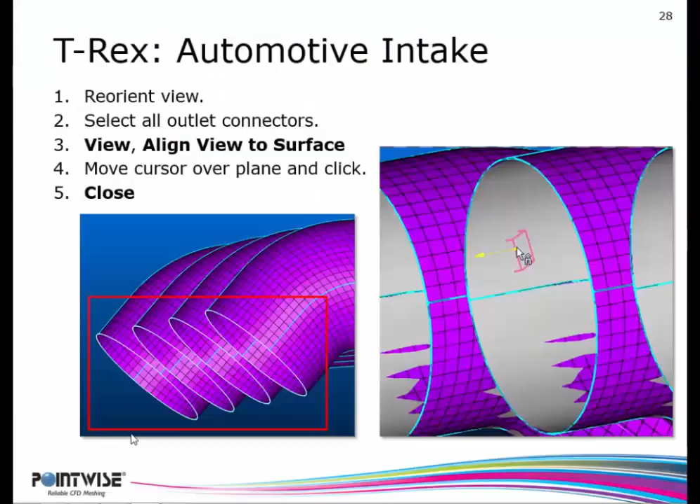So what we're going to do is we're going to pick up where we left off. When we stopped for the break, we had just set the orientation of our extrusion. So now what we're going to do is set up a couple of other attributes for the extrusion. All right, so we've already selected.

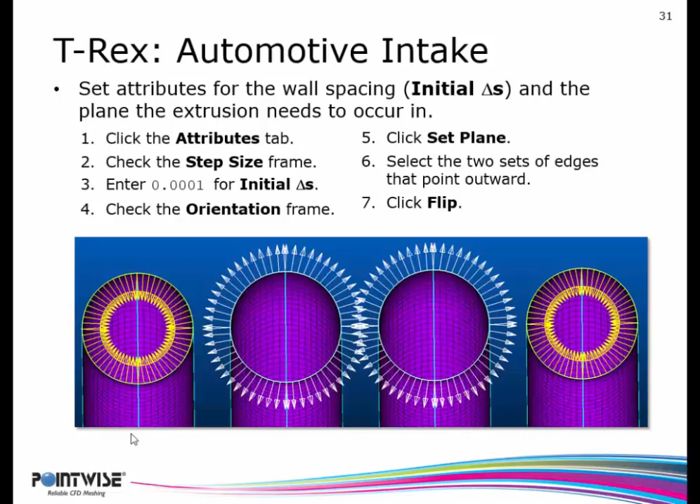Now you'll notice in your book, these edges are flipped outwards instead of the two that I had. This can vary. So what you need to know is when you're doing extrusion, make sure that all the marching vectors are pointing in the direction that you need them. Once you've done that, then the next thing I do is go to the step size frame and attributes and set your wall spacing. For this case, it's going to be 1e to the negative 4.

So up here, if I click on step size, right here, my initial delta S, I'm going to change this to 0.0001 and hit enter. Now, there's a little tip I'm going to give you here. When you're doing extrusion, most of the time you guys already know what your wall spacing needs to be based on whatever y plus value you're running. If you don't, and that's rare, I try to always keep my extrusion wall spacing smaller than this value right here, the minimum surface spacing.

The reason being is if it's larger, then when you extrude off your surface, you could be making a cell that is taller than it is wide. Does that make sense? And that tends to lead to increased crossing in corners and problem areas. So I try to keep my initial delta S smaller than the minimum surface spacing as a rule of thumb.

Now, we've set our initial delta S, we've set our orientation. Now what we want to do is we want to march our extrusion into the interior of each of these outlets to create this type of OH grid. So I'm going to do that for 25 steps. So this is giving me 25 layers effectively in my boundary layer for these pipes. So I'm going to click on Run and type in 25 and then click Run.

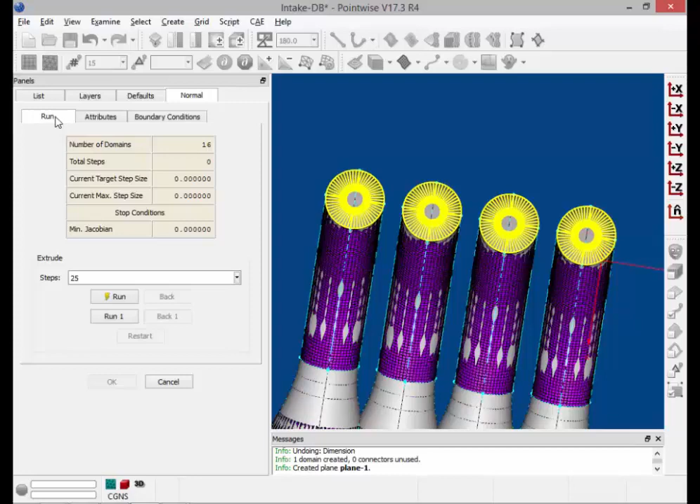Whoa, what happened there? That's not nice. All right, so let's go back and look. All right, all this looks okay. My orientation is fine. Nothing should be changed there. Let me see. Set plane is fine. Oh. All three. What? All right. Just 1 second. Okay, that's what I thought.

So what happened there is a mistake on my part. So when I was in the Attributes tab and I set that initial delta S, what I did wrong was I only had some of my outlets selected. I didn't have all 4 of my extrusion edges selected. So I only set my initial delta S on some of the edges, not all. The ones that failed were the ones that weren't selected, and they had the old initial delta S, which is a large value for this outlet.

So now, if I select all of them, you'll notice that in the initial delta S field it's blank. And in Pointwise, whenever you select multiple things and you have a field blank like this, that typically indicates there's a mixture of settings for it. So that's a clue to me of where I went wrong.

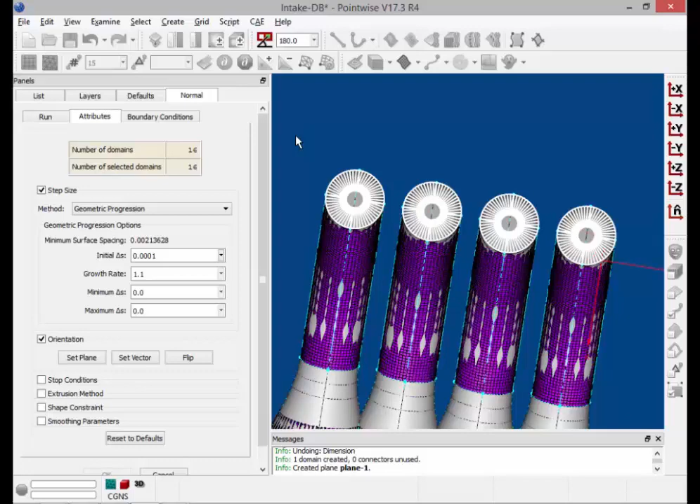So let me go ahead and fix this and type in 0.0001 and hit enter. And then go to Run and run my 25 steps in. I'm going to click on OK. So you should see what we have as a result in each outlet is an extrusion that looks like this. Okay?

So now to finish off these outlet domains, there's a couple of things we have left to do. The first thing is, for each outlet, we need to pick these 4 connectors and assemble a structured domain. So that'll give us an OH topology. The next thing we're going to do after that is we're going to run the elliptic solver on these domains to smooth them out and optimize the shape, much like what Eric showed you earlier using the floating BC.

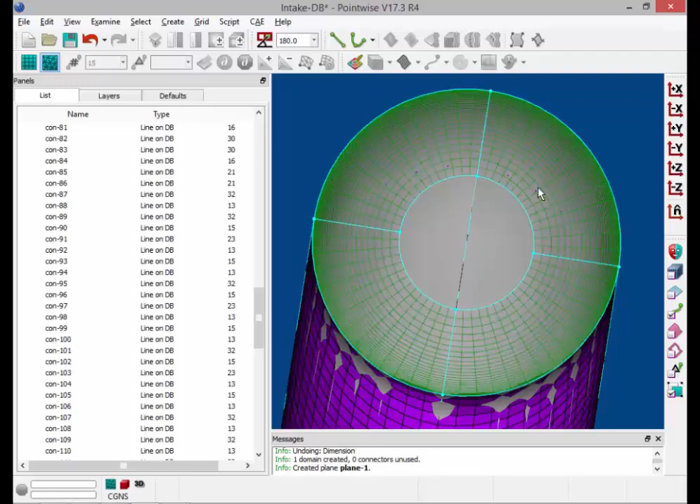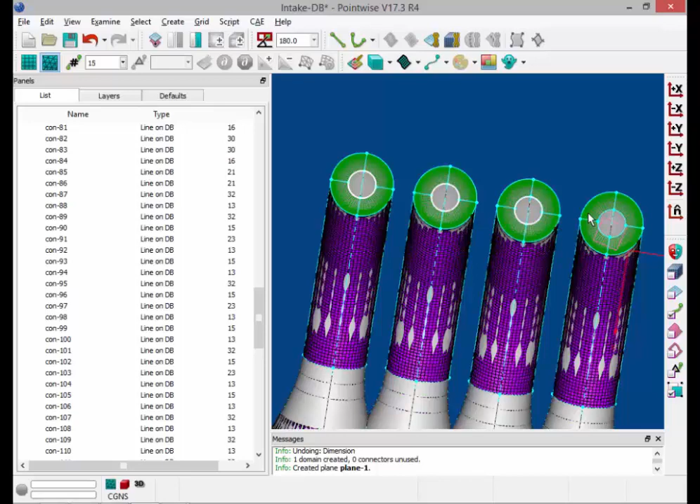So here you can see we're going to select these 4 connectors. We're going to select the structured grid type and then assemble domains. So I'm going to zoom out a little bit. And I'm going to use a shift select box to go through and select these sets of connectors. I'm going to make sure I set my grid type to structured, and then I'm going to pick assemble domains. All right, so now I have my 5 structured domains at each exit.

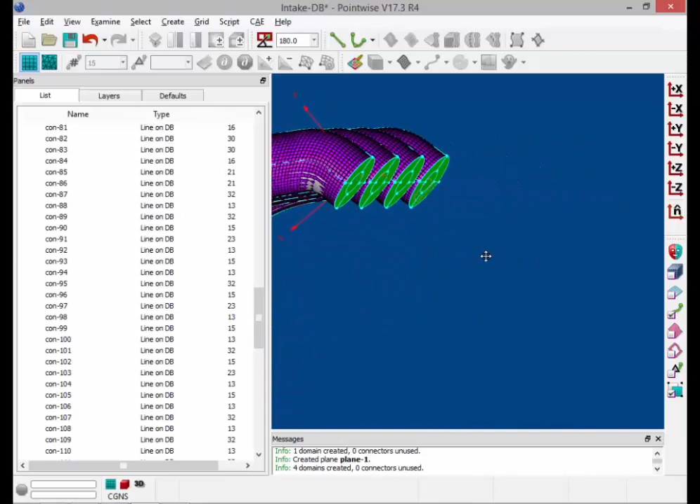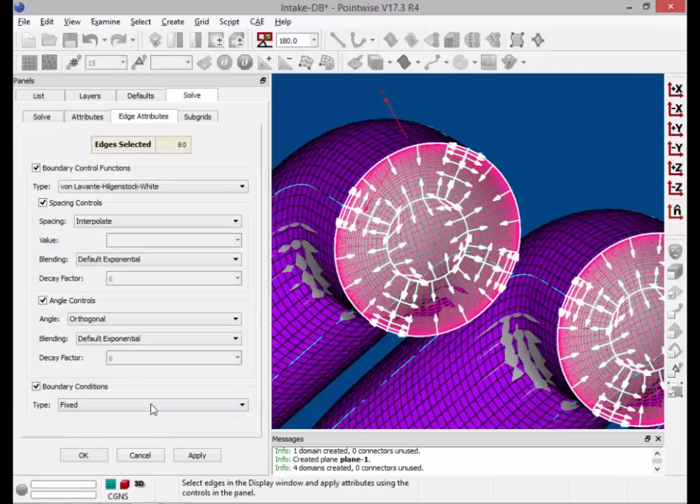I'm going to run them through the elliptic solver just like we talked about. So I'm going to use the selection box again to grab just the outlet domains and go to Grid, Solve. And this is very easy to do. All I have to do in Edge Attributes is change the boundary condition from fixed to floating. And then under the Solve tab, I'm just going to run these for 50 iterations.

So now, my OH grids have all been modified. The boundary shape's been modified, just like what Eric showed you earlier, for a more optimized shape. What I like about using the floating BC for these types of topologies is, before I did this, the skewness in these 4 corners was really bad. And this significantly improves the skewness in these corners.

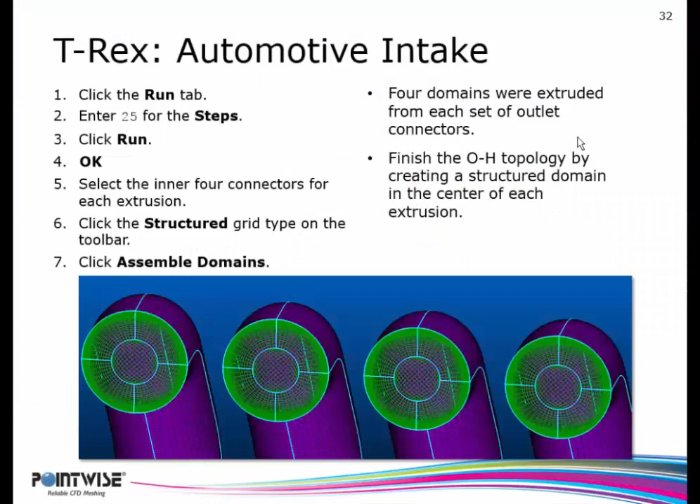All right, and this is just sort of going over what we just did in the solver. Here's what those domains look like. The skewness before we ran them through the solver: the maximum value for equiangle skew was 0.9. And then after we ran them in the solver for 50 iterations, it went down to 0.34. So it was a significant improvement in the skewness.

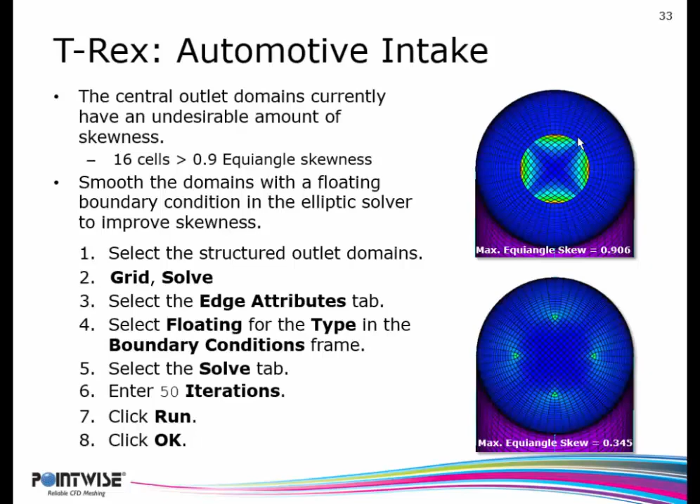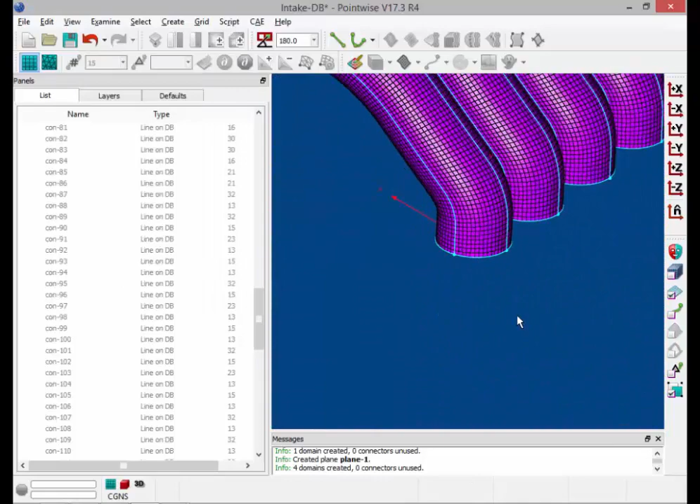So we've got all the domains. So now what we need to do is create our block. This is the easiest step. So we're just going to go in here. I'm going to zoom out a little bit. I'm going to turn off the display of the database too. Let's see. I'm going to select all these domains. I'm going to set my grid type to unstructured. And then I'm going to go to the block assemble command up in the toolbar and click on that.

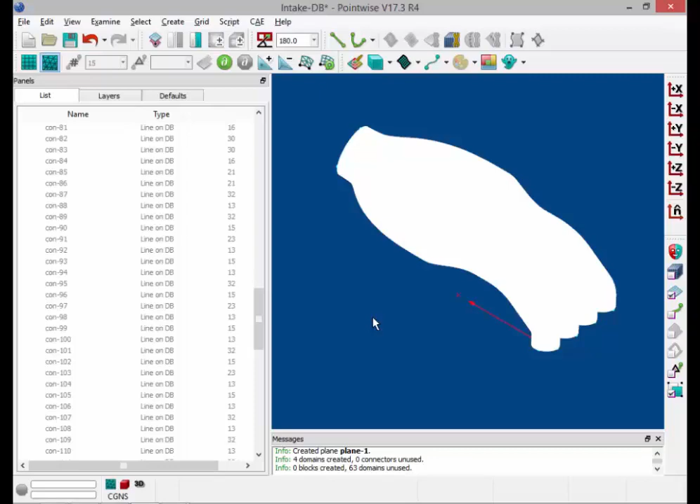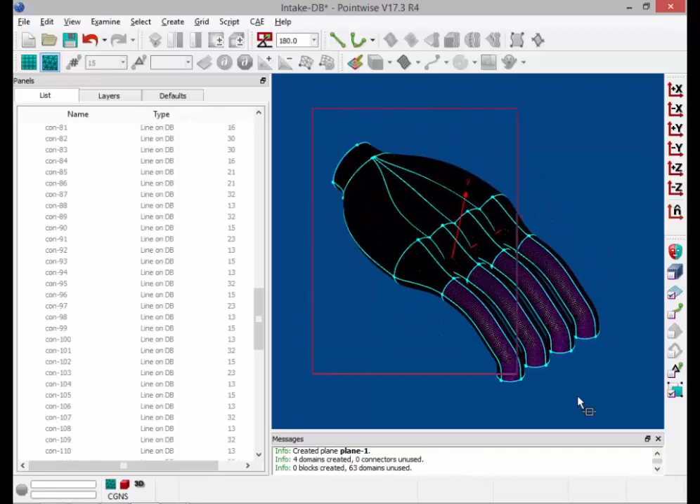Let's see, it says 0 blocks created, 63 domains unused. So why don't we have a block? Let's look. We have all of our outlet domains created. We have our inlet domain created. All right, so does anybody have any ideas what a typical reason for a block not being created is? The dimension connectors between the structured and unstructured mesh. It could be that we missed one of those and it's not watertight. Watertightness is the most common reason for a block failing to assemble.

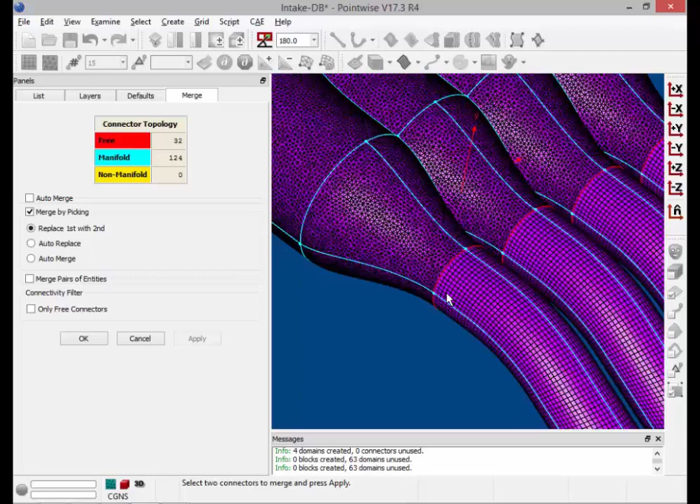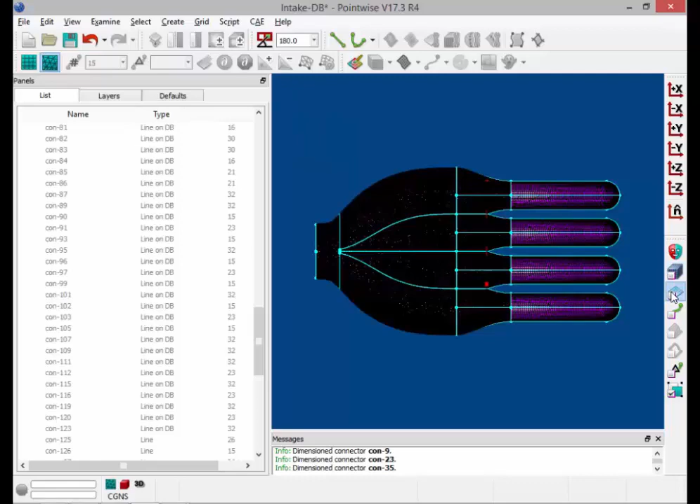All right, so let's go. Yes. Yeah. Because remember earlier, we undid this step when we were playing around with that, and I never redid it. So he hit the nail on the head. Very observant. So this is easy to fix. You guys remember what the fix was? We're just going to change the view. We're going to grab the connectors, not the domains. And I'm going to change those to 15. They're now identical. So now, if I select all the domains, I should be able to assemble the block. Yep. So, good catch. It's just about always a watertightness issue if you can't assemble the block.

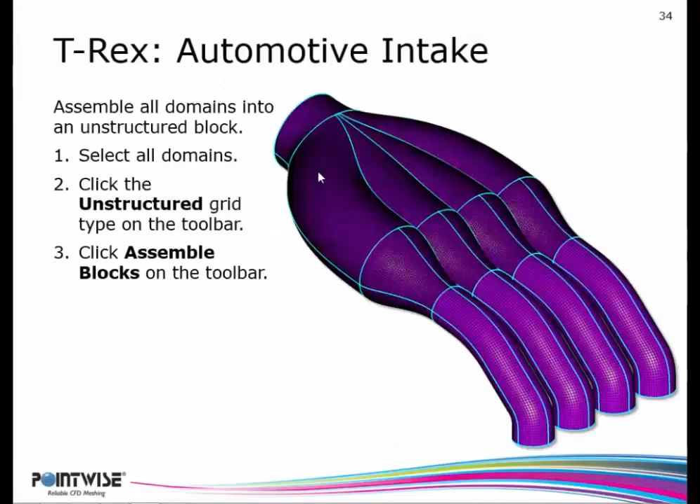All right. So now let's go in and set up some of those T-Rex attributes we talked about earlier. So we're going to select the block and go to Grid T-Rex. For the max layers, I know that in that O-H portion of the grid, I set the O grids to be about 25 layers. So I think 40 is ambitious, but I'm going to put a larger value in there than I think I'm going to get, just to let everything grow out to isotropy. I'm going to set 5 for full layers. For this case, I'd like to ensure I get a certain number of prisms and hexes in the initial boundary layer. So I'm going to shoot for 5 layers.

I'm going to turn on push attributes. So push attributes is what tells Pointwise, if you have an unstructured domain set to a match boundary condition, you can change the characteristics of that domain to match the T-Rex boundary layer. So it can modify the domain itself. And where this is going to come into play is the inlet domain for the entire intake. You'll see it get updated.

In the advanced frame, we're going to change the collision buffer. In this case, I'm going to set it high. I have pipes, and they're all growing in. I know they're going to collide, and I want a reasonable area inside the pipes for tets to grow. So I'm going to set it to a large value and use 4. In the skew criteria frame, I'm going to set this to 170, and then we're going to initialize.

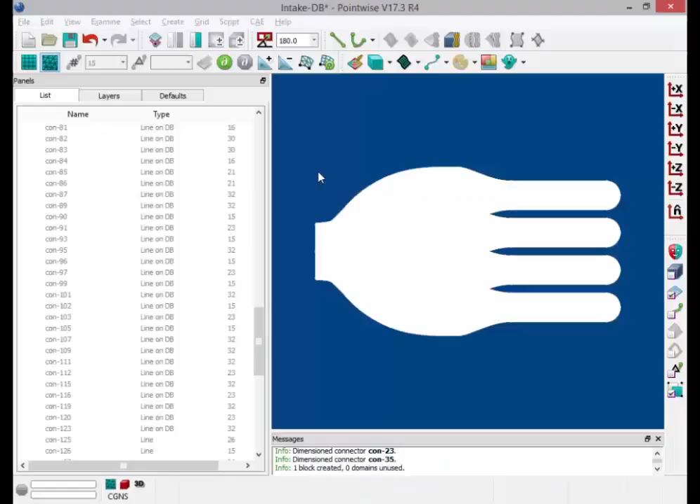So I'm going to select my block, go to Grid T-Rex. I'm going to set my max layers to 40, and I'm going to set my full layers to 5. I'm going to turn on push attributes so it can modify my unstructured match domains. In the advanced frame, I'm going to uncheck use default for the collision buffer and increase it to 4.

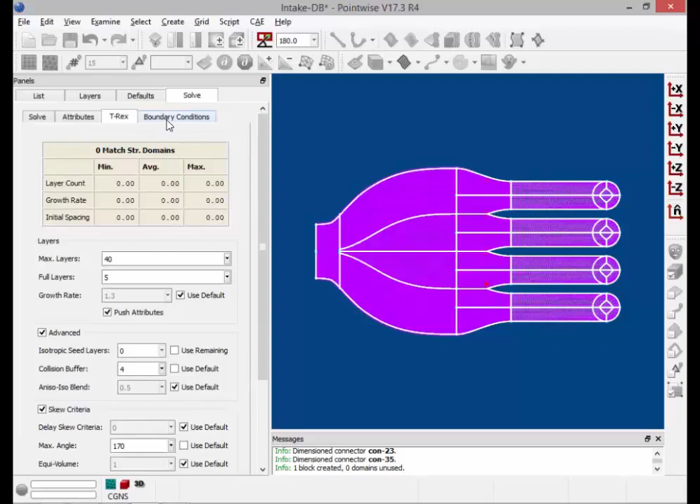Then I'm going to come down here to skew criteria, and I'm going to set my max angle to 170. This value works well for most solvers. If you're using OpenFOAM, you're always going to want to use 160. So, just a note. Now, boundary conditions are the next thing that we need to do, and this is an important stage.

So what we want to do here is we want to create all the boundary conditions we're going to need for this mesh. I need one identifying the inlet domains as match. I need one for the outlet structured domains that we created. They're also going to be match. And then I need one for the intake walls. Those are going to be all the other domains that we're going to grow off of.

Now, my strategy when creating boundary conditions for T-Rex is to do the easy ones first. The reason for that is if I do the ones that are really easy to pick first, like the inlet and the outlets, all that's left are the domains that go into one BC. So I can use a trick to select those and assign them so I don't have to pick them out by hand. So let's go ahead and create these BCs. So I'm going to go to New and name this Inlet and set the type to match.

Now, you are going to see something here I have not talked about, which is adjacent grid. This type for T-Rex is for a very limited case, and it's where you have a T-Rex block, and it sits on top of an existing structured block or a prism block. And in that situation, you most likely want the layers that grow in the bottom of the T-Rex block to grow so that there's not a volume ratio jump between the two blocks.

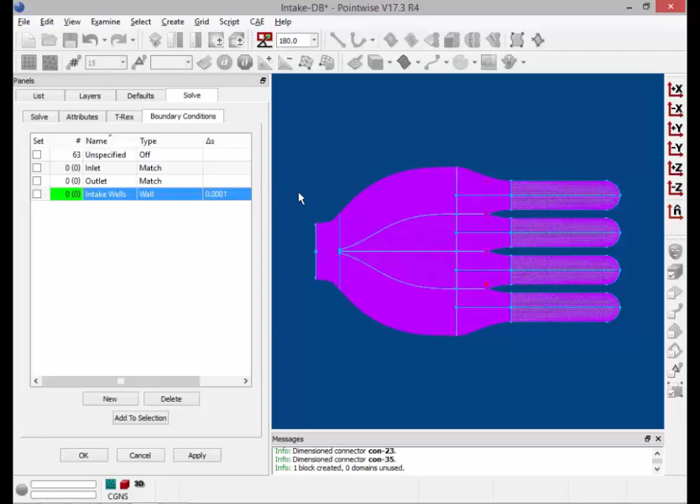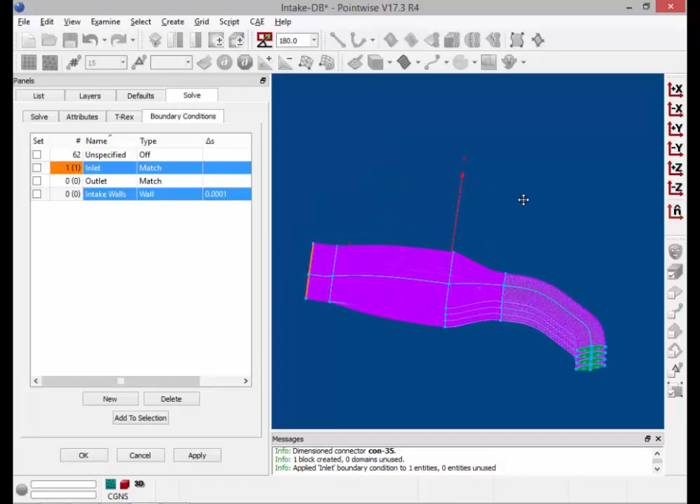All right. So now we just need to go around and assign these boundary conditions. So the first one is the inlet domain. I'm going to select it and then come over here and click on Set for the inlet BC, and you see that the number field is populated with a 1. Then I'm going to rotate this around, and I'm going to use a selection box to grab all those structured outlet domains I just created. I'm going to come over to the table and click on Set for Outlet.

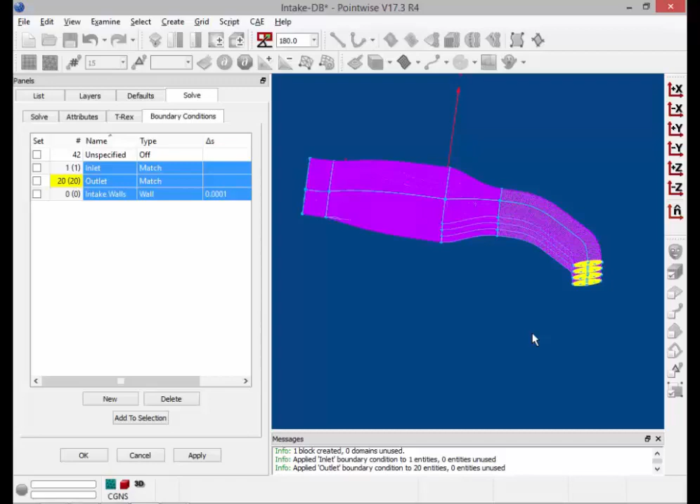Now, my trick is, like I said, always pick the easy ones first. Everything that's left that hasn't been set is sitting up here in the unspecified BC. So my trick is simple. I'm going to click on Unspecified. I'm going to use this button called Add to Selection at the bottom of the panel, which selects everything. And then I'm going to click on Intake Walls.

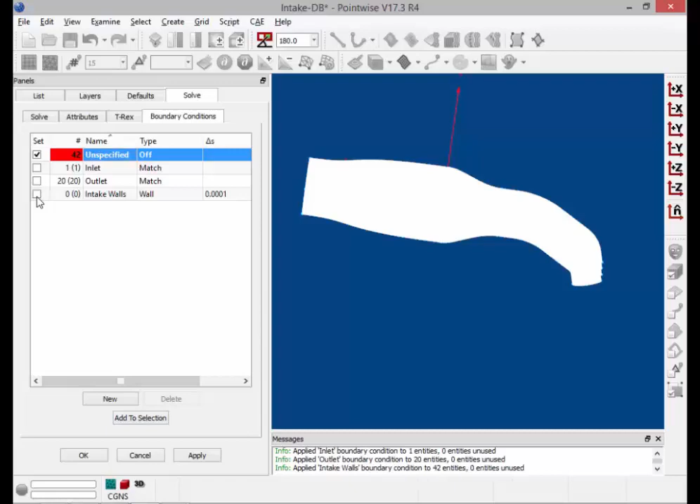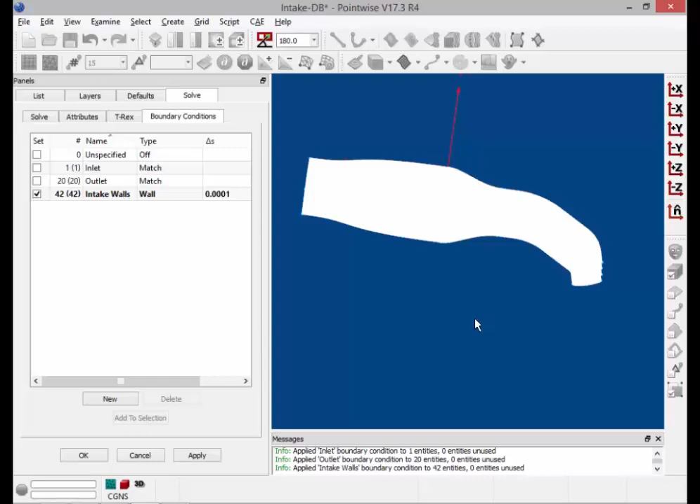It seems trivial, but I routinely work with these really large grids that have thousands and thousands of domains. This trick has worked out for me very well with all those cases. There's always a couple of simple BCs you have to set, and then 500 domains that have to go into one. So this is a great productivity enhancer. All right, so we've set everything. So now there's one more step.

You'll notice that when I was setting up the T-Rex attributes, I completely skipped growth rate. That's because of this table that we've added. So this table at the top of the T-Rex panel essentially is giving you feedback about any structured domains that are set to a match boundary condition. Because when you grow T-Rex alongside structured domains, you don't want T-Rex to modify those domains.

In general, we believe structured grids are sacred. Don't touch them, don't modify them. Somebody spent a lot of time making them look exactly how they look. So we want users to be able to make sure that T-Rex is matching them as closely as possible. So as soon as we set those structured domains to a match boundary condition, this table got updated with all the information we know about those domains.

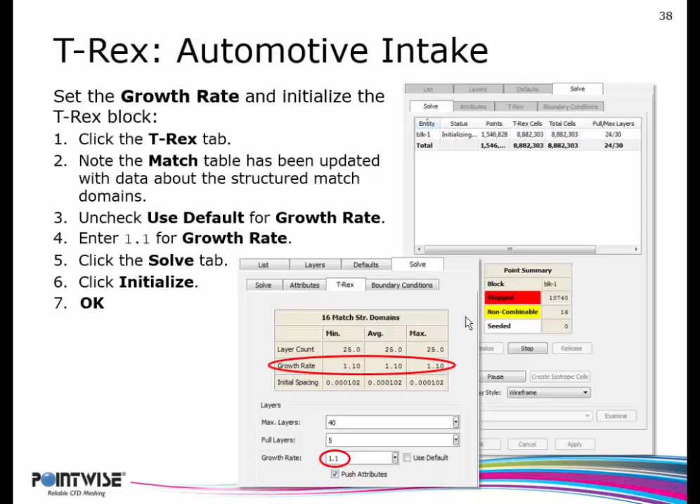So if I switch back over to that T-Rex tab, I can now look at my settings and make sure that they're good for those structured domains. All right, so T-Rex. Yep, sure enough, it's populated. So this is telling me that for all the structured match domains, the initial spacing is 1e-4. Now, when it started, it was exactly 1e-4, and you can see that now it's 1.02e-4. So it did modify that spacing a tiny bit.

I don't think it's enough to change what we're going to do, though. The growth rate has stayed at 1.1, which was what we used for the extrusion. So I'm going to use that growth rate with my T-Rex grid here so that it matches. I've already set the wall spacing for my T-Rex grid to be 1e-4, so that matches up.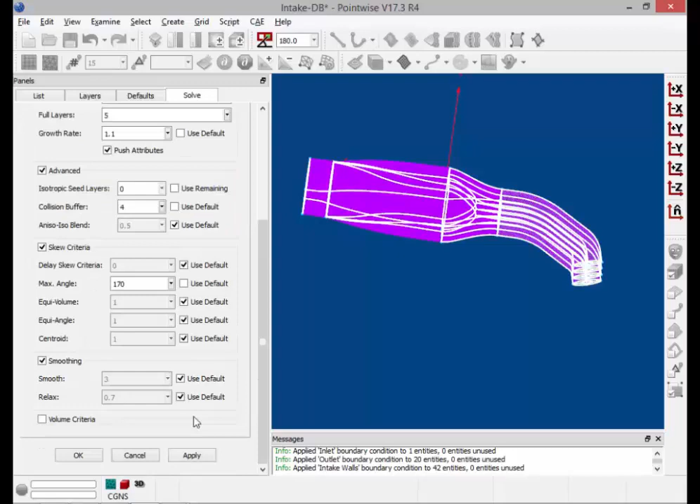So I'm going to uncheck Use Default and set my growth rate to 1.1. Any questions about any of this so far? All right, so now we're ready to run this. Get a good view. So I'm going to click Initialize, and I'm going to also expand this.

Now, I'll tell you right now, this T-Rex frame is wide. So when it's running, I usually stretch it out so I can see all the information. And there's quite a bit that's going to happen here. So the white that you see is the front growing. This is the vertices advancing. And you're going to see this updated here with the number of cells, the number of layers.

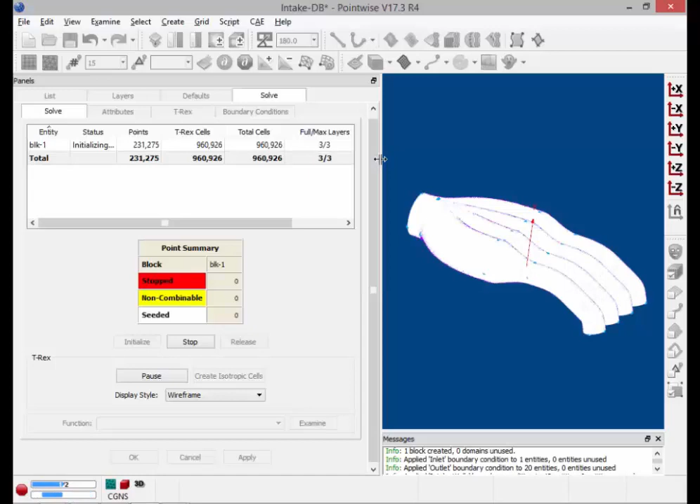You see a number and a slash and another number. So on the left, that's the full number of layers you're achieving. On the right, that's total layers you're getting. So right now, we're 3 for 3. Down here, this is going to be populated once we have interior points begin to stop locally. It's giving you feedback about those points.

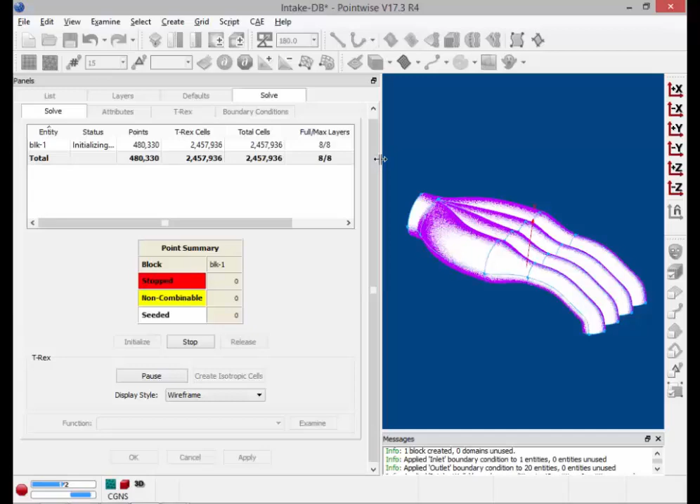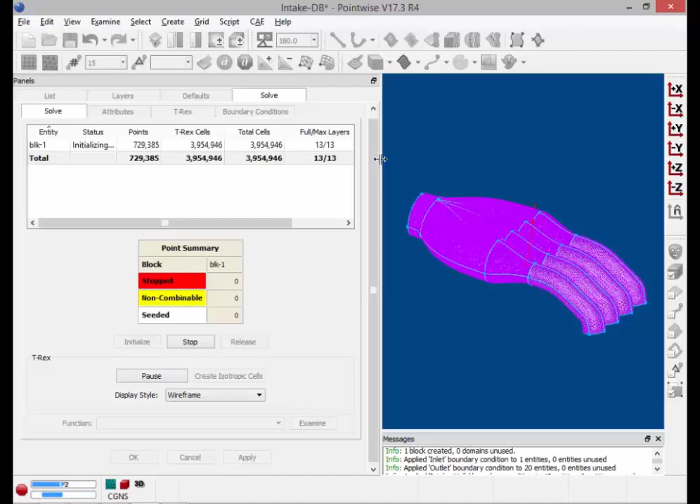So it's marching out. We've already exceeded the 5 full layers that I asked for. So who knows how far it could get now. We should start to see some points stop soon. So you want to start looking for red. When you see the first red point, that's actually a really important thing for me. I usually initialize a grid once, and I watch it like this, and I look for that first red point.

And then once it's finished initializing, I go look at the surface mesh right there. And I see, was there something wrong with my surface mesh that was the cause of it stopping there early, or did it just stop because it reached isotropy? If it's isotropy, great. If there was an issue with my surface mesh, then I want to fix that and then reinitialize.

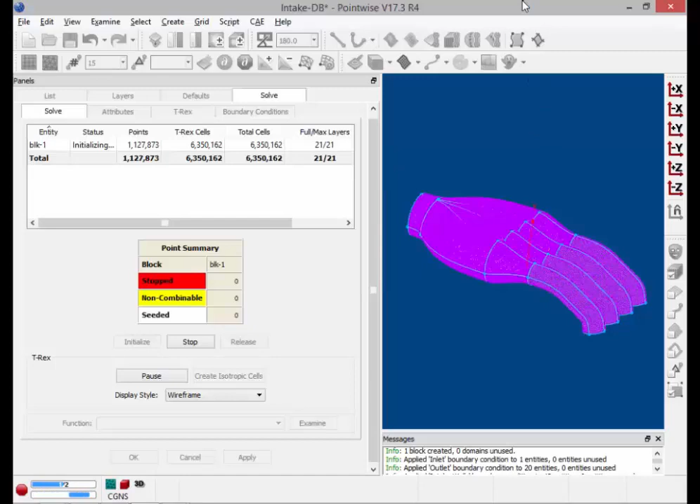Okay, so 20 is still going. It's just that you can't see what's going on inside here. Let me see if we can zoom in and get a little bit better view. No. Well, while we're waiting, any questions about what's going on so far?

Yeah. Would it be also possible to use the nice outlet mesh to extrude it to the... Yeah, that's... Again, use only T-Rex in the unstructured part because then you would have a nice... That's definitely a way to do it. Actually, before I put this together, I meshed this like 3 different ways, and I was trying to decide which way I wanted to do for the presentation. That was one of the ways we did it.

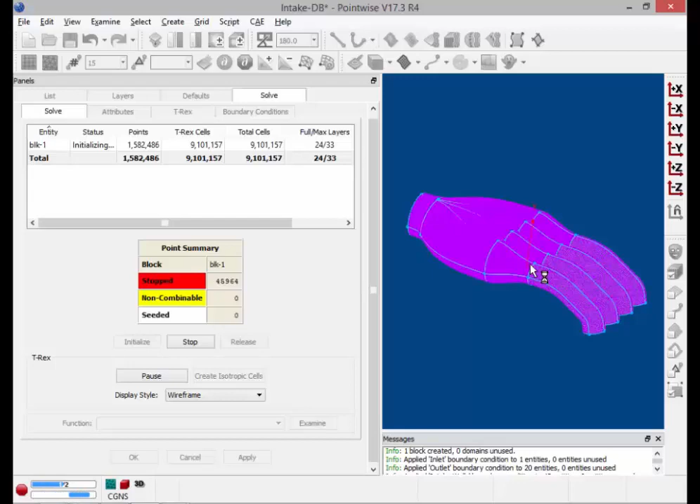If I remember right, what I did was, I made the outlet domain, and then I used one of the connectors on the surface as a path connector, and I marched it through like that. And T-Rex in the other section. Right, so one section was all hexa, and then T-Rex was in that part where, you know, the bulb coming into the pipes. 2 steps, not in 1. Yeah, 2 steps.

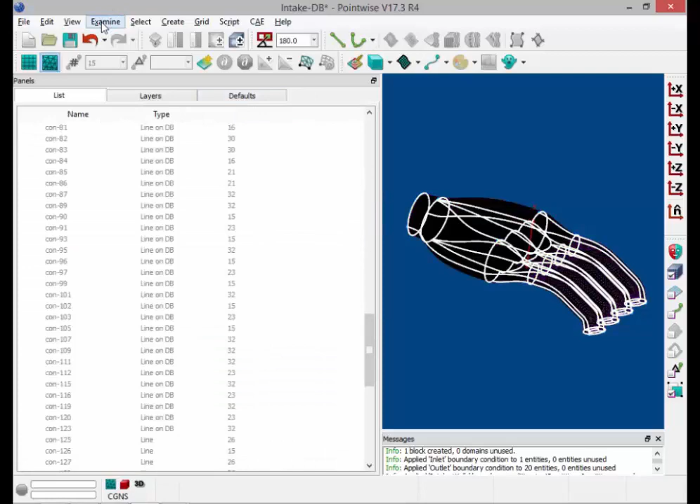Okay, it finished. We got 23 full layers and 33 total layers. So let's see what this looks like. Now, I'm going to select my block and go to Examine and Max Included Angle. I'm going to go to Cuts, and I'm going to turn on Enable Cutting, and then change it to a Z physical cut. Now, I'm going to move this cut to the middle of one of these pipes.

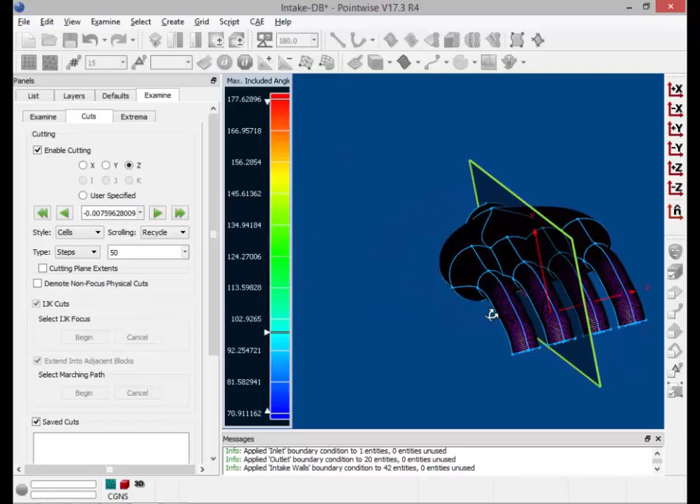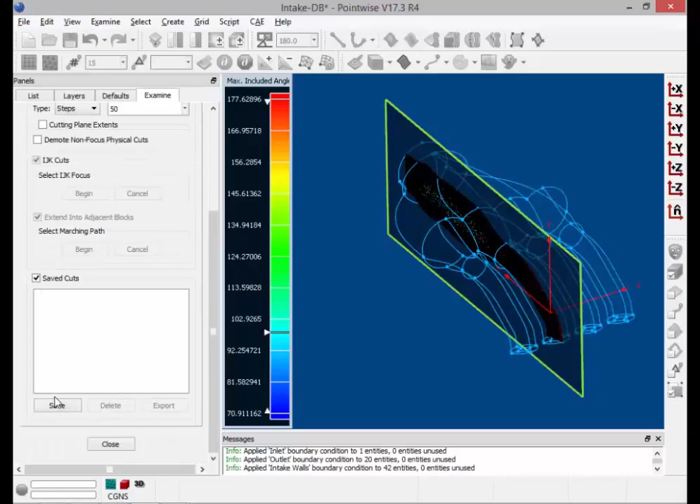Now, the only problem right now is I've got a cut, but you can't see anything. So I'm going to turn off the display of domains so it's easier to see my cut. So View, Show Domains is turned off. I'm going to save the cut too. And now let's click on a Z view and zoom in. So you can see the layers that we got in the pipe region and up here.

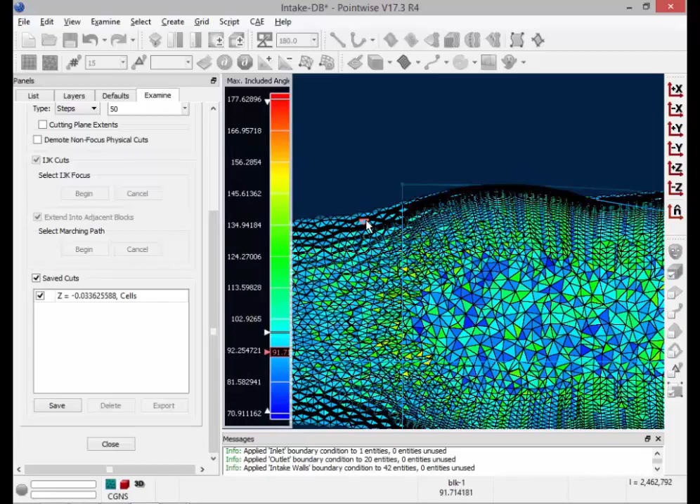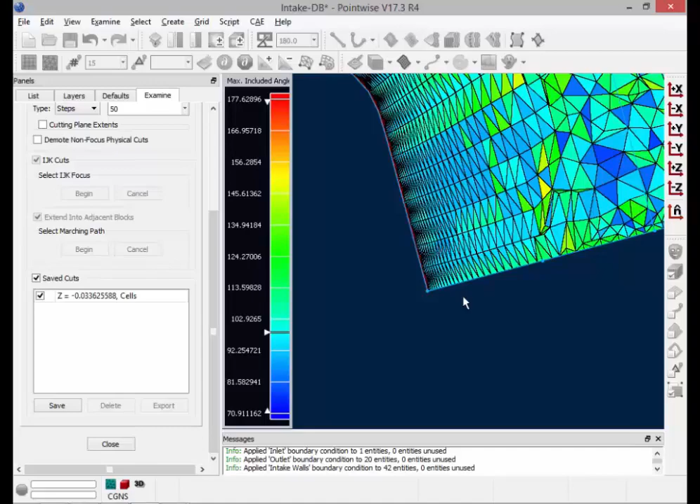Now, what you're seeing here though, and I'm sure you're all probably wondering about this, is those don't look like hexa or prisms. That's because T-Rex in version 17.3R4 creates tets, anisotets, and pyramids. And then when you export, it combines all those into prisms and hexa.

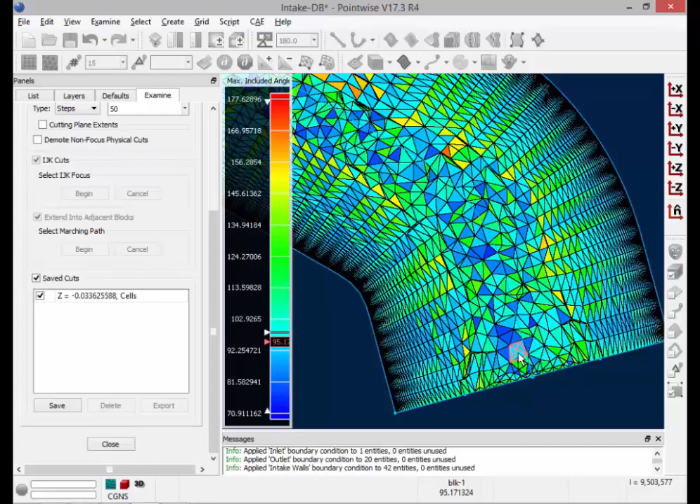In version 18, which we are working on right now, all this happens on the fly. You can get hexas or prisms as you extrude. And this is sort of a preview of what it looks like in version 18.

I'm not going to show you any more because it really is still under development. But we have some lovely hexa layers.

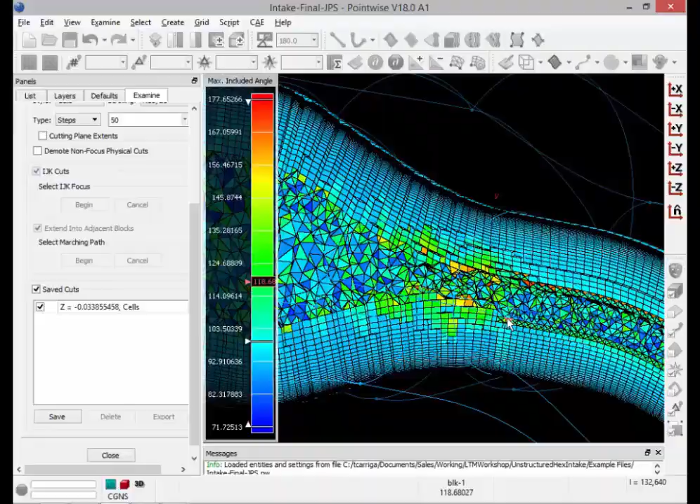So in the version of Pointwise that you currently have, you still have tets. To get hexes and prisms, you have to exit out of Examine, export your file to your CAE, and give it a name. When you export to your CAE, you're going to want to check on this Combine anisotropic tetrahedra.

What this is going to do is tell Pointwise it can go ahead and start combining those layers of anisotets into prisms and hexes. It will also touch the pyramids.

For this case, when we export it, right now it's around 9 million cells when it's all tets. When we export it, it combines down to 2.1 million prisms and around 400,000 hexa, for a total grid size of about 3.2 million. So it's a pretty significant reduction.

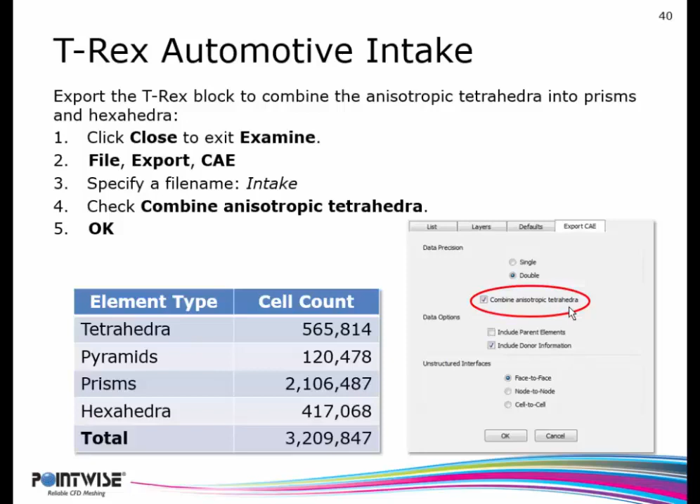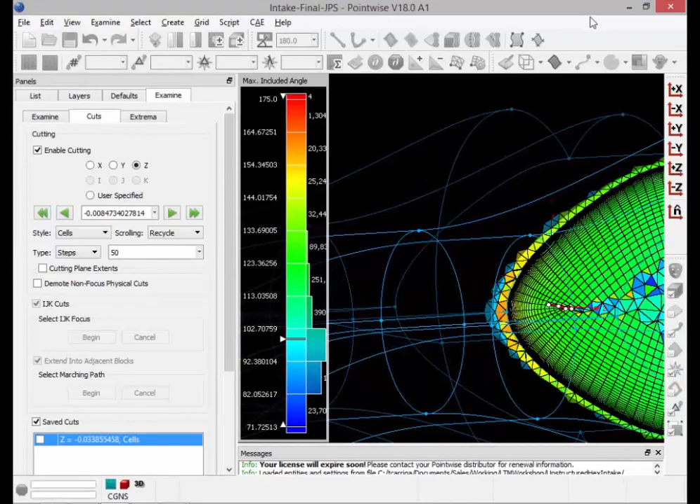Now, talking about this T-Rex cell combination, there's actually a lot of different solvers that can do this. Right now, for this case, I am using CGNS.

CGNS is sort of our generic default that we recommend, but if you use any of these other solvers, you should have access to this cell combination on export. And this list grows day by day as we add solvers.

Pretty much if your CAE solver supports all the cell types that exist in a T-Rex combined mesh—prisms, pyramids, tets, and hexes—you'll get those cells.

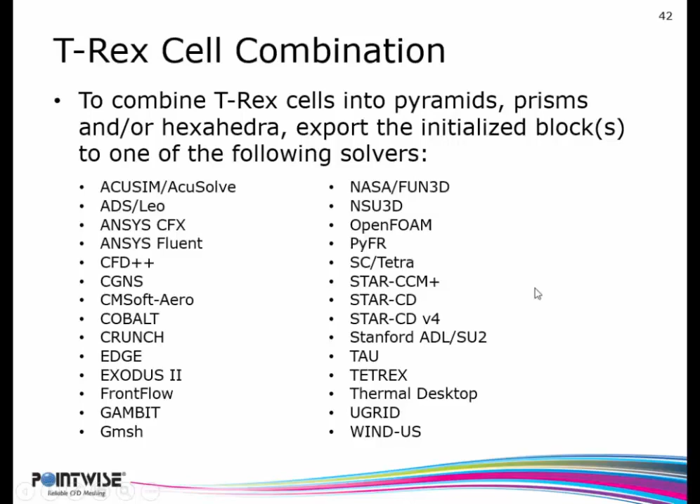Now, when you grow cells off the unstructured domains, every stack of 3 tets will be combined into a prism. And off structured domains, those base 7 cells get combined into 1 hexa. After that, it falls right back into that same algorithm we use for unstructured.

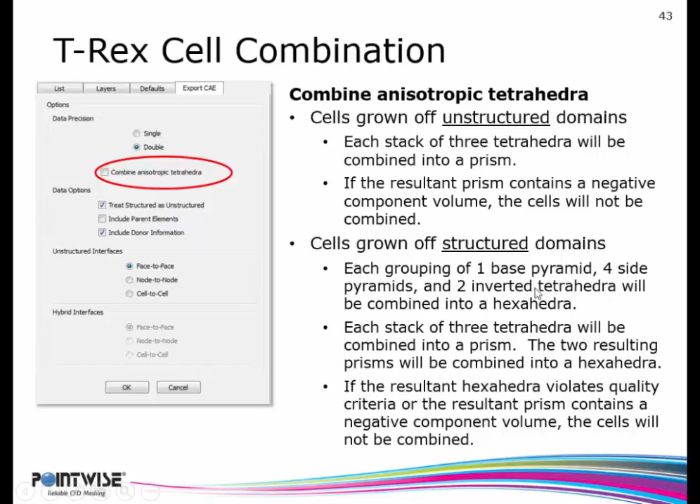After combination, if it was an all unstructured surface mesh, you could see up to 67% cell count reduction for your T-Rex mesh. Theoretically, if your surface mesh was all structured, you could see up to 88% cell count reduction.

But most people I've talked to like to use a hybrid approach. Most people aren't using all structured or all unstructured. They're doing sort of what we had here with the intake manifold, where a portion of their grid uses structured domains, a portion uses unstructured, and they're trying to leverage both techniques. So in general, it's usually a mixture.

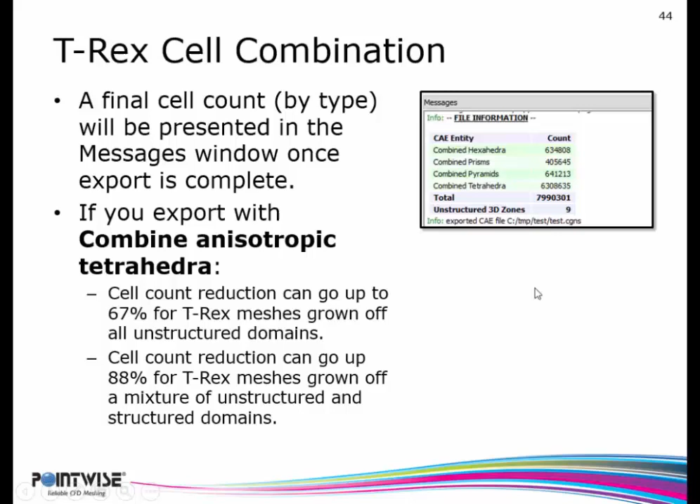We're going to move on to best practices. Some of these we've already talked about in the course of that case study and questions. So what I did here is I looked at the most common questions and problems we've had from customers over the past years with T-Rex, and I tried to collect those together.

The first one that I see crop up a lot is large area ratios in the surface mesh. These usually occur at a domain boundary like this.

Typically, it's because people just weren't paying attention to spacing constraints. I've done it myself where I thought I changed all my spacing constraints at the boundaries the way I wanted them, and I missed one, and I got something like this.

So what I tend to do is whenever I'm creating a mesh—not just for T-Rex, any unstructured mesh—I create my surface mesh, and when I'm finished, I do a visual inspection. I go around the model, rotating it, looking at it, and wherever I have a node junction like this where many connectors come into one node, I usually select all the spacing constraints of that node and set them to the same value.

It's very safe to do with an unstructured mesh or a hybrid mesh. And that would resolve this issue if you did this as a step before you got to block creation and initializing your T-Rex mesh. Go around and examine all those node junctions to make sure they have similar spacing values.

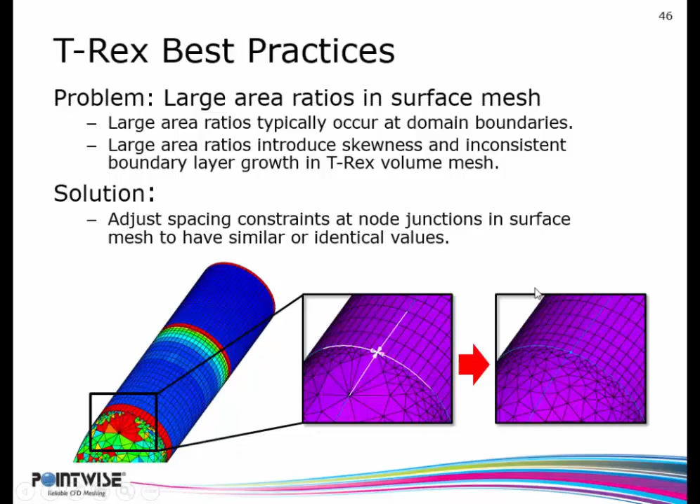Now, the other issue that comes up a great deal: it seems like almost every geometry we see has at least one surface that looks like this. It's very long and skinny. And if you put an isotropic unstructured domain on that surface, it's not going to look good.

By not looking good, what I mean is, for a wing like this, most people would want 3 cells across the trailing edge, consistently, all the way across. If it was an unstructured domain, you'd get 3 cells at the very end, then it would start making 1 cell across, and then 3 cells at the other end, and it would look sort of funny. So most people like structured domains for this reason.

So how you handle this type of surface is put a structured domain on it and create a T-Rex mesh, where you would get hexa off of that. Or if you want an all-prism T-Rex mesh, create the structured domain and then select it and go to create diagonalize. This will allow you to put a diagonal edge through each quad, which should result in prisms when you export.

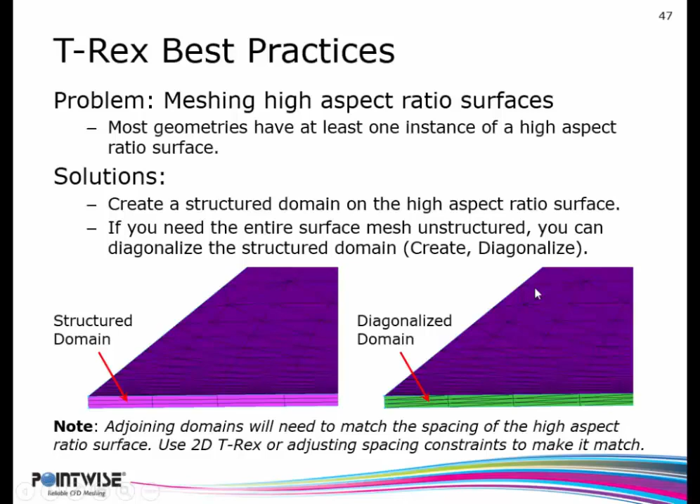Another thing we see a good bit is somebody will create a T-Rex mesh, take a cut through like this one, and see this fanning in the isotropic mesh where it connects. Have any of you ever seen this or had this problem? Nope.

Typically, this is a result of the surface mesh having too high of an aspect ratio. T-Rex can handle anisotropic surface cells, but there's a certain point at which it's not optimum anymore, and it struggles to connect up and create high-quality tets at the interface.

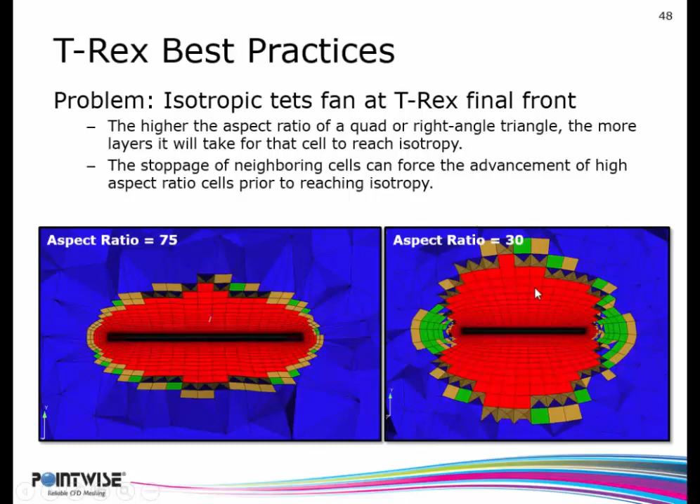So what I always advise in that case is take your surface mesh and change the aspect ratio. Get it down—I like to get mine under 40 if I can. The reason being, that's going to reduce that fanning and give you a more consistent growth of your T-Rex layers. You can see the fanning's been reduced here by doing this, and it's really easy to take care of this problem.

One way to do it: let's say if it was a wing, increase the dimensions of the connectors in that direction to bring your aspect ratio down. Sometimes it's a spacing issue where somebody's got very tight spacings on the domain on either side and the center of the domain has gotten very stretched.

A third option I've seen people use, but it doesn't have as big of an impact as these first two, is sometimes you can get a little bit of mileage out of using an MRQS distribution instead of a hyperbolic tangent. With an MRQS, you have a little less stretching in the center of a connector than with a hyperbolic tangent, but you won't get the same effect as these two.

If I've got a surface mesh that's quads, I try to get it below 10 for the aspect ratio for the best possible results in the volume. If I've got an unstructured surface mesh, I try to get the aspect ratio generally under 40 for the best results. You can also use that aniso-iso blending factor I talked about earlier—bump it up to 1, which is the maximum, and that will also help the transition from the high aspect ratio surface cells.

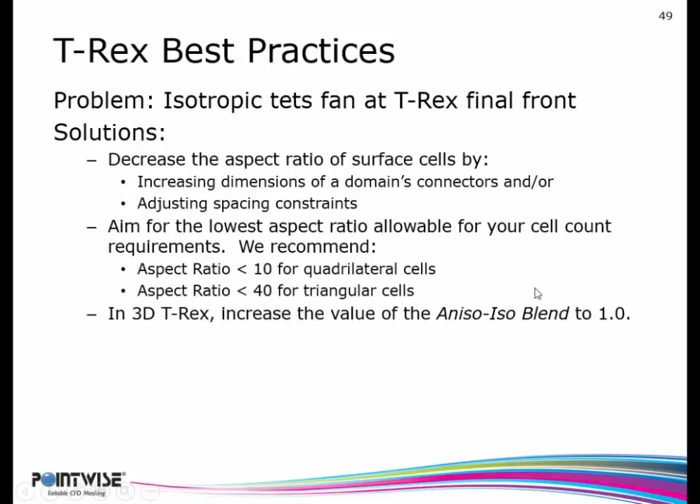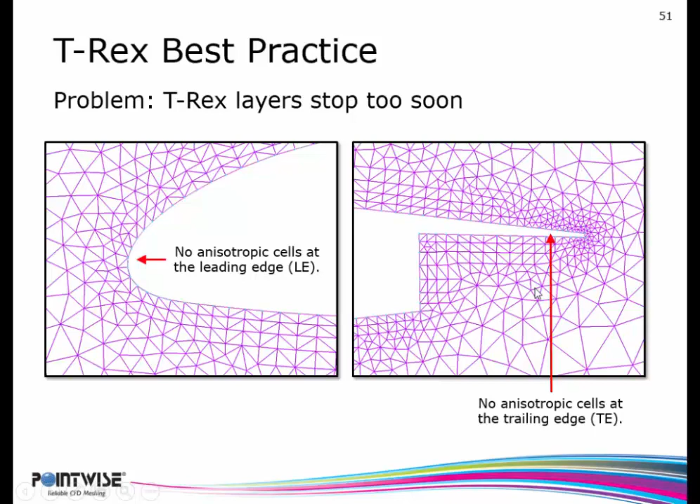So there are a couple of ways we can try to solve this. We can set the full layers attribute to a non-zero value. This is going to force the T-Rex cells to go past isotropy, so they're going to be anisotropic in the direction normal to the surface. It will still stop locally if we encounter a negative area, a collision, or a skew criteria violation, but it will push it past isotropy for these scenarios.

The other thing you could do is change the spacing of the grid points so that the edge length locally is larger than the T-Rex wall spacing. That would also give you some cells. In general, I use a combination of these two solutions. When I run into that, I set full layers to a non-zero value, and then in some areas of the grid, I change the grid spacing too on the surface.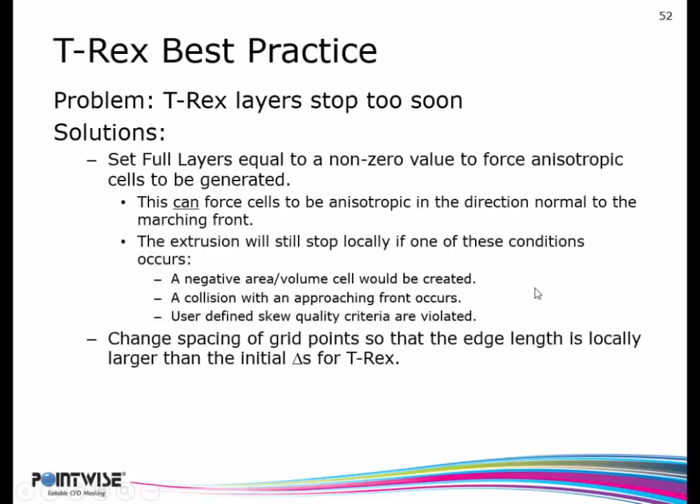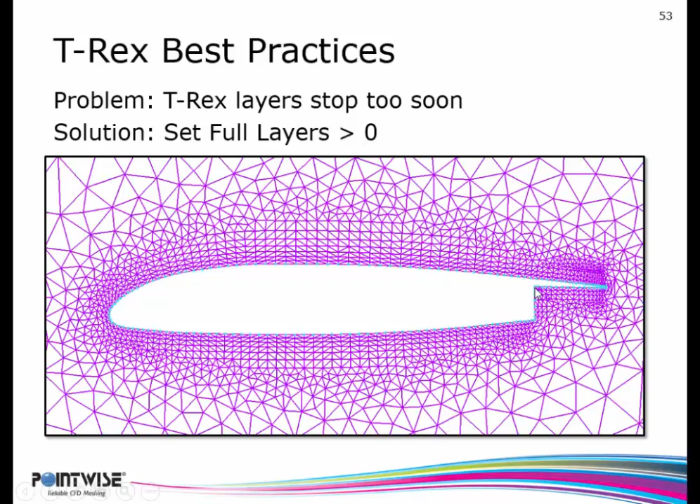If you look at an example of this, in this case I've just used one of the solutions. I've set full layers to a value greater than 0. If I remember right, I set it to 3, and you can see that here. I've got 3 nice T-Rex layers on the leading edge. I love the effect, actually. However, the trailing edge for the same setting looks awful because I'm pushing it way past isotropy for this.

So ideally, what I would do here is leave the leading edge alone, set full layers greater than 0, and back here, if I could, I would increase this spacing in this direction, just a little bit.

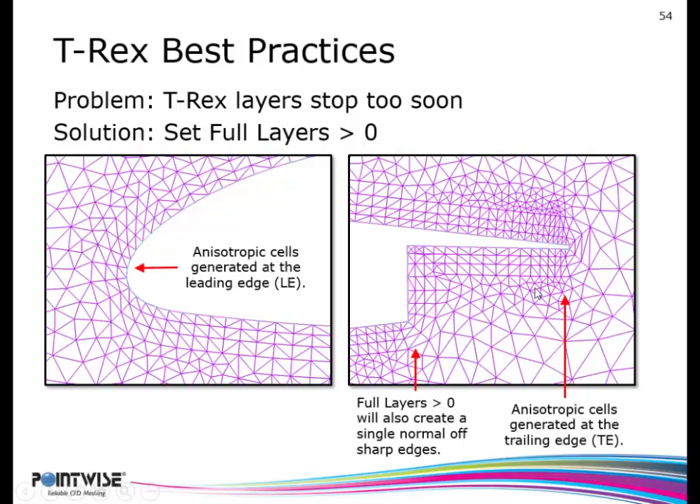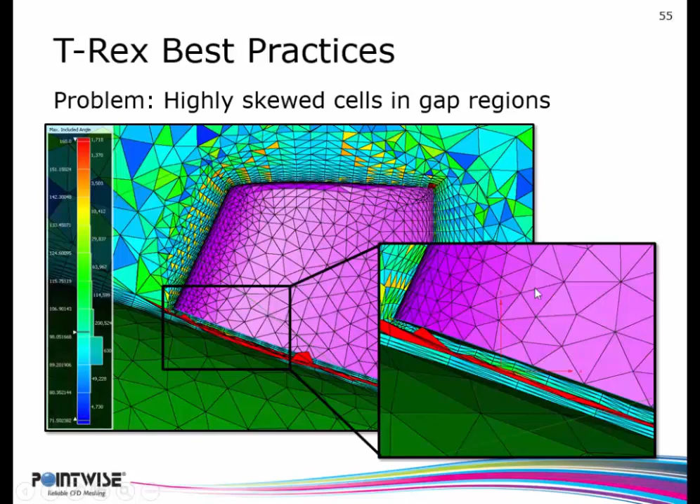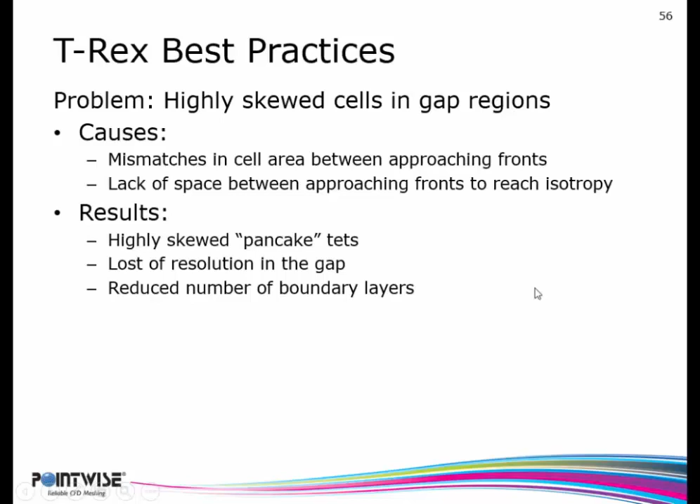So let's march on. He hit the nail on the head there. Mismatches in cell area between the approaching fronts causes a lot of skewness. Also, lack of space - that's the very definition of a gap problem. So we're going to get those pancake tets that you saw. We're going to lose resolution in the gap when this happens, and we're also going to have a reduced number of boundary layers, which probably is one of my biggest fears.

So there's a bunch of solutions. I don't always use all these. I don't throw my entire bag of tricks at every mesh. I'll pick one or two of these things, try it, initialize it, see if that improved my results, and then do a little bit more if it didn't.

So the first thing I usually do is increase the collision buffer. I'd say 70-80% of the grids that we work with, a collision buffer of 2 works very well for these gap problems. For that intake that we did earlier, I tried 2, and I wasn't happy with the quality of cells I was getting, so I bumped up to 4 and saw a huge reduction.

Another thing I might have done for that intake would have been to bump the max angle down even further. That would have retarded the growth of the T-Rex layers and given even more room for tets.

I set skewness criteria. So I say don't generate T-Rex cells that have a max angle higher than this. If you're using OpenFOAM, that needs to be 160, period. Other solvers are more tolerant of included max angles, and I've seen some go up to like 178, 179.

What they usually wind up doing is if they have a really flat cell like that, they just locally run first order around that cell and then second order everywhere else. Not a great thing. I would prefer to avoid that if I can. So I usually stick somewhere between 160 and 175 depending on the solver.

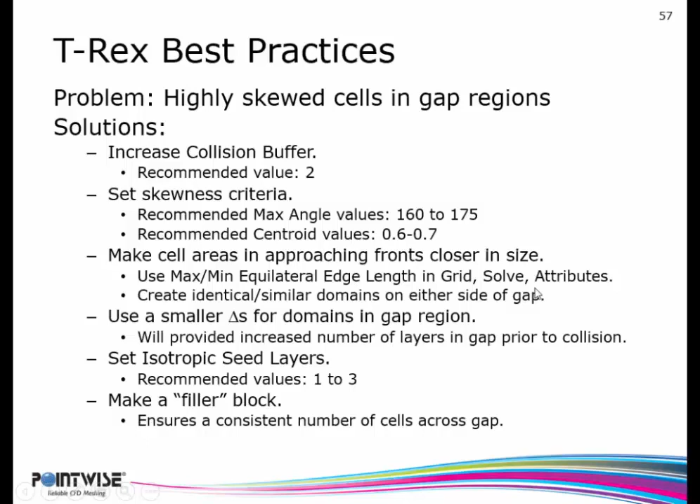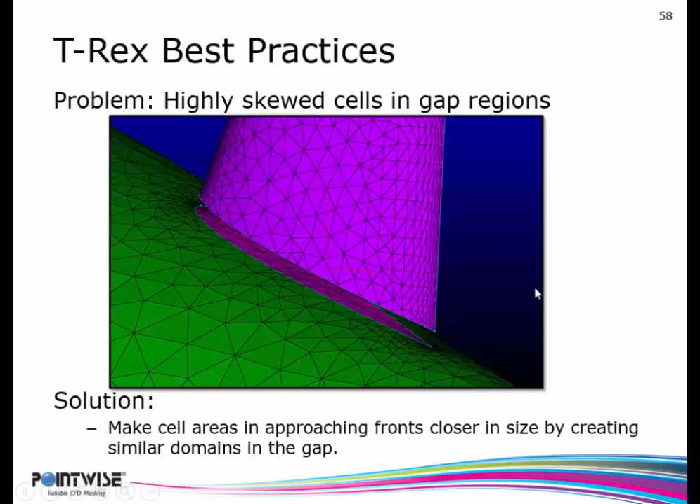So in this case, I took the domain on the bottom of the control surface and I projected it down into the submarine. I recreated the domain around it, and then I reinitialized it. Oh, I also set the collision buffer max angle. So I didn't use all those solutions. I just used a couple, just so you can see how the grid's not all the way there yet. There's still more I can do, but it's a move in the right direction.

The grid's already starting to look better. For me, the resolution could be a little bit better. I could have more points here. I might turn on isotropic seed layers. There's more you could do, but my point with all of this is there are several solutions. Not all of them are appropriate for every grid. Play with them, try them out on your specific case, and see what you like best.

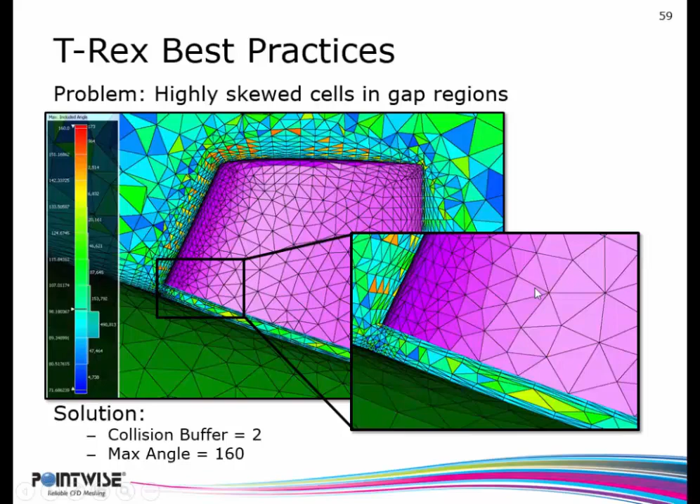Now, this is one of the last problems that we've run into. We often have people that have a big multi-block structured grid system, and there's one component to it that is just so hard to create a topology for. It would be a lot of extra work to make that section structured multi-block. So they want to just put a T-Rex block in that area instead. And you can do that.

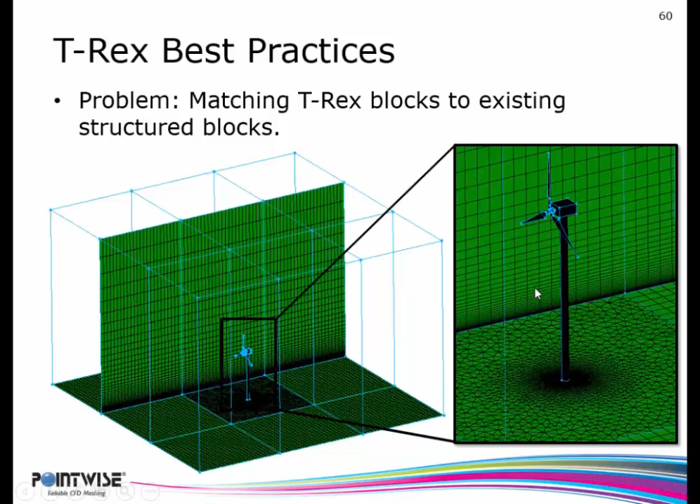You saw a little bit of this with the intake manifold, but in this case, this was for a wind energy case that we got. We made a T-Rex block around the wind turbine. Everything else around it was structured. And we just set all these structured side domains to match. And we used the trick that you saw with the intake manifold where we made sure that the growth rate was similar, the spacing was identical, and it matched up really well.

So there's only one trick left here that we didn't talk about, and that is if you can modify the structured grid at all, if you can set the distribution of the connectors off the surface to geometric, that will make the match even better. Most people by default use a hyperbolic tangent distribution for their structured grids. Hyperbolic tangent does not use a geometric growth rate, it varies. So there can be some variation between it and T-Rex in that situation.

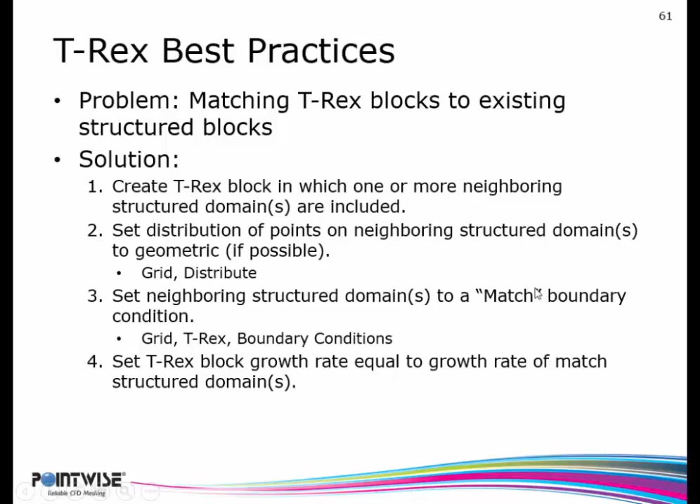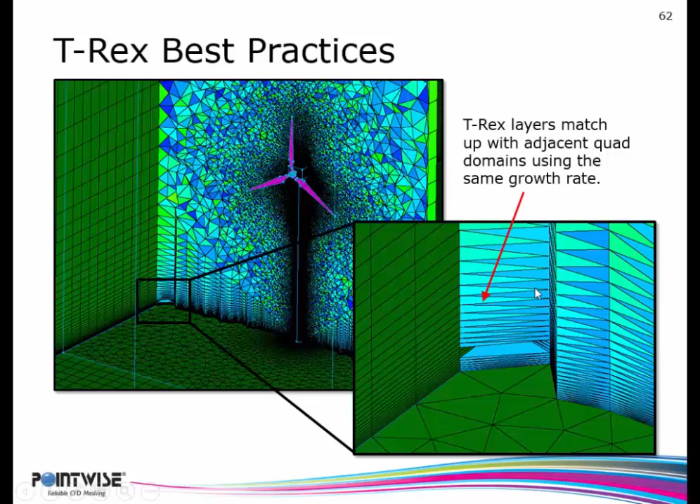If you make the structured grid have a geometric growth rate off the surface, you're going to see a better match with T-Rex. And this is what you see in that situation. So it allows you to use the best of both worlds and have a little bit of flexibility. So that's it for our presentation.